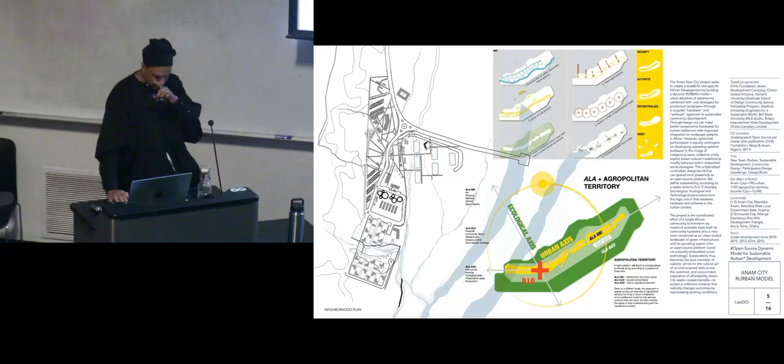This is a project which is still ongoing. We built the first neighborhood. Now it's sort of become a kind of school. One of our proudest achievements was actually getting it into Google. If you ever put a new town into Google, there's a whole process, it has to go through review and all kinds of people checking. When your new town is on a site that's half of the year an island, there's a whole process. But eventually you get through, and it's still ongoing.

The reason why I mention it is that what was particularly significant working in this context was taking materials directly from where you're using them. We built many of these bamboo structures because they were low cost, we could do them fast and quick, and we were able to obtain bamboo by talking with the local deity of the bamboo forest, called Otos, negotiating and requesting access to use these materials, and at their end of life they can return directly back into the soil.

This was, for me, a very profound recognition of a model we use now at Penn State, where I teach the capstone design project or thesis for M.Arch students. We often refer to this model of living and building, recognizing that living at its core speaks to qualities of motion, and building at its core speaks to stasis and the ability to accumulate things in a particular place. Architecture is this negotiation between constant flux and flow of materials, energy, entities, but also, viewed from an African context, spiritual dimensions of reality. All of this exists within the spaces where we try to intervene, ultimately recognizing that we are doing nothing more than trying to modulate these flows of energy and materials over time.

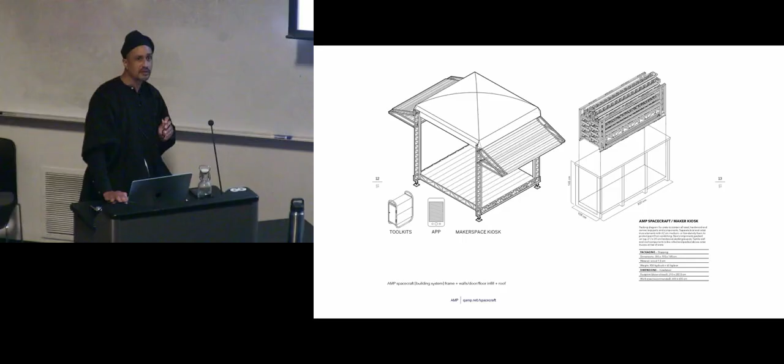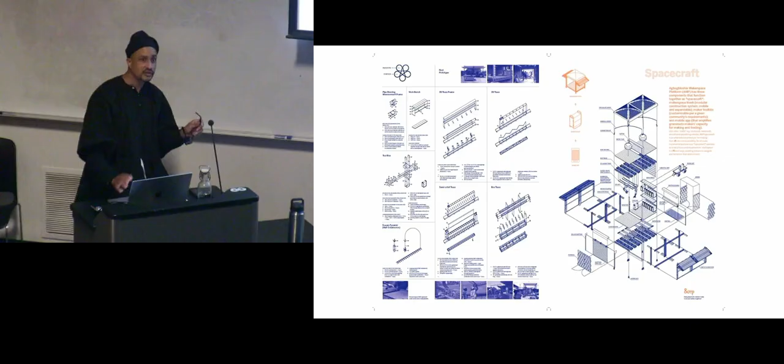Over time this led to the development of a mobile, prefabricated, deployable makerspace, which not only can function as a pop-up makerspace, but also can pack inside of a crate and be deployed. Thinking of this as a kit of parts means you're not just designing the overall building, even if it's small, but actually designing each component and the ways these components can be put together.

This put us in a position of straddling the world of architecture and design with the broader arena of maker culture, thinking about how urbanism and future urbanism are produced—they don't necessarily have to be constructed purely through the design imagination of skilled, highly trained professionals, but can in essence be democratic. How can we make not only the aspects of design, but also the manufacturing or production of architectures, inclusive?

The motivation for this is that if you look at the continent of Africa, which is today the youngest continent on the planet, it's the only world region still experiencing growth. All other world regions are essentially maxing out their human population, and moving into the future will be declining. By the end of this century, there will be hundreds of millions more young Africans coming into the labor force, job market, coming of age, and looking to build futures.

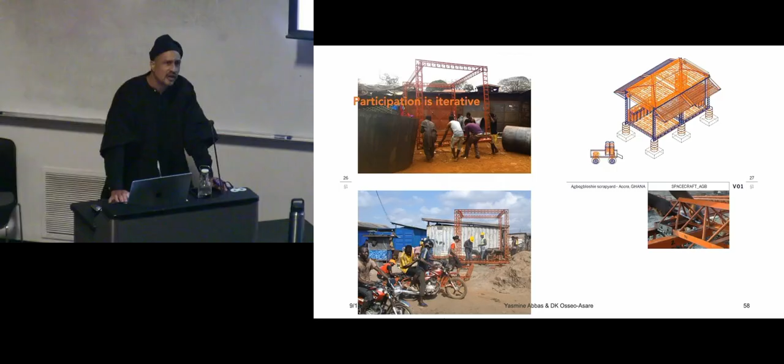For us, that's a fundamental reason why, through this process of participating with makers in all these different spaces to iteratively build a series of makerspaces, the goal has never been any single instance of those, but rather the slow—not that we want it to be slow, but by its nature it often is—iterative development of what we call the AMP spacecraft, a space for crafting. This is a pop-up, mobile, deployable makerspace first developed in Ghana. We did a technology transfer from Ghana to Senegal for the Dakar Biennale, and then they used that as a pop-up fab lab. It's even traveled from Senegal to Mauritania and then back again. So even the architecture itself is moving between countries.

This participation is mobile, so you have people working together from all over the world, but the key is that this participation is a network.

I'm just going to quickly move you through some of these spaces. This is one of the repair shops in that same scrapyard, where we early on recognized that what was often demonized as just a place where things were thrown away was actually a place where people were scavenging, in a way cannibalizing all the detritus of the city, and using that to build, for example, new computers.

At the beginning, the idea of the makerspace was to think about how we could conceive of a small micro building as essentially a large machine that you can walk into. Here you see early tests of aerial trolleys, which we're making as small gantry cranes. The intention is for this to become an overhead, essentially robotic arm system that can support humans in fabrication, but which can be made locally by makers.

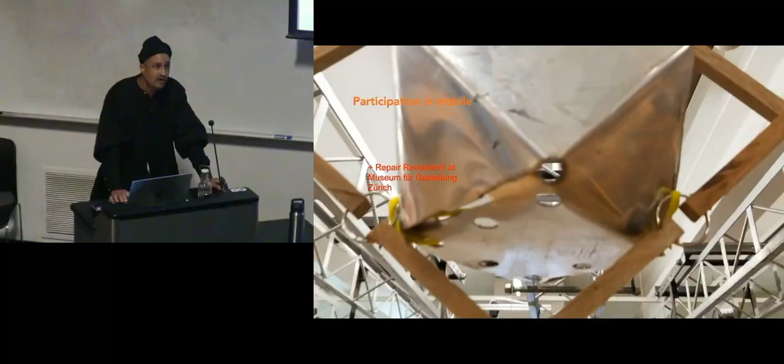This is a dialogue that allows all of these folks to work together on the co-development, and then the makerspace continued to function as a pop-up, and as a makerspace for workshops in the museum, then moved out into the city of Karlsruhe, and then traveled on to Zurich, where it was part of a show called Repair Revolution in the Design Museum in Zurich.

And you can see here on the wall, we actually iterated the next version with the same group of makers in Ghana of what we call this Parawall, as well as these modular components. We were excited that we were exhibited right next to the VW Bug as icons of design. But that same spacecraft is now in Austin, Texas, where it's just been used in a second theatrical performance. So for us, the notion of a spacecraft as a space for crafting is really intended to be not just a space for using 3D printers, but really a place for unlocking the imagination.

I know that I'm more or less at time, but I want to just show a few images of this project to reinforce that same notion, and also this idea of unlocking creative potential and possibility. For us, the key with participation as a way of low design, as a way of lowering the barriers to architecture and participation in design processes, is that once is not enough - history matters, and you really have to focus on versioning.

So this is an example where in just a few minutes I'll show you a project which began as a proposal for MoMA PS1. We called it Bambot Fufuzela as a kind of alternative to robots. Robot, if you know, is actually a word which etymologically speaks to notions of being a slave. And we propose the idea of what it means if we think about architecture as truly emancipated - as living creatures that can exist within our society, but are not required to do our bidding, but essentially entities that we can think about in terms of rewilding the city.

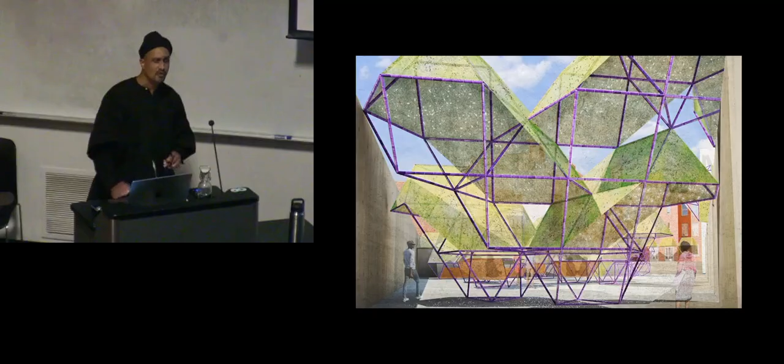So these were sort of proposal sketches. This is the one that MoMA decided to exhibit in the show. And here's the model when we were demounting the day of.

But for us, this was really a prompt to start to unlock the possibilities of this. And we continued this project, even though MoMA wasn't really convinced that we could build it. They were like, how can you guys do all this bamboo stuff?

We continued working with the government of Ghana. We wrote this chapter looking at the future of Pan-African museums, a Presidential Commission looking at the future of museums, monuments, and natural heritage in the country. And for the chapter on architecture, we proposed these Fufuzela as free architectures, in opposition to the notion of the museum as a white box where you put things inside to preserve them, but instead a museum that is free to walk around the city.

So we made these initial drawings, and that led to essentially several years of prototypes, starting on the left, in the same scrapyard, at the very edge of it, in a school, where the same scrap community worked together making this first bamboo structure before it became part of a national exhibition of emerging Ghanaian contemporary artists in Germany, and then continued as the Ghana Pavilion at Venice, and then following as an installation you see on the right called Enviromolecular.

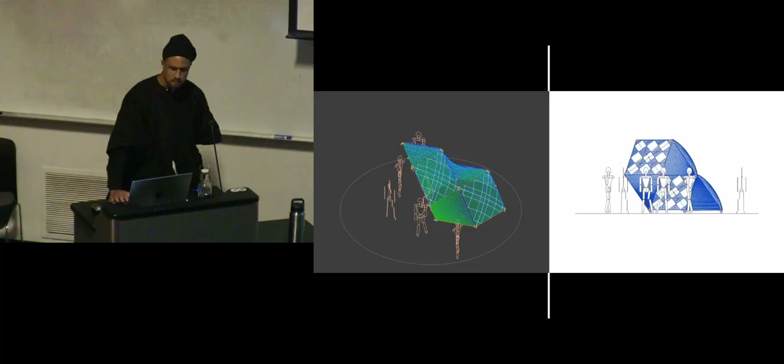And similarly for this first show in Dortmund, the curator, Nana Oforiatta Ayim, was able to actually negotiate for a number of objects that were looted from Ghana during the colonial period and were held in private collections, to have these exhibited as part of the show.

And for each of these objects, we deployed these structures as essentially a home for the spiritual rehabilitation of these objects, working with traditional knowledge keepers from Ghana. We went through certain amulets and energetic elements that were brought into the space to support these objects, which were very significant cultural artifacts in their host communities, to support them in their future eventual journeys back.

And we were able to transition to digital fabrication of the components, a whole host of different experimental orientations, and this eventually led us to the ability to use this as the infrastructure for Ghana's second pavilion at the Venice Biennale, which we did with a budget of nothing, because we were able to reuse or upcycle components from a previous exhibition, and work with some amazing young artists from Ghana, as well as collaborators from Brazil.

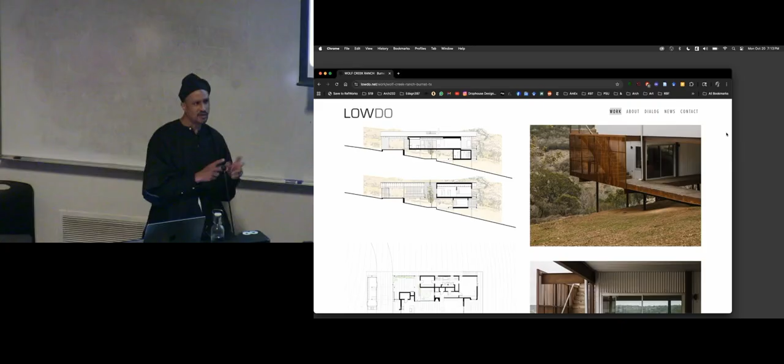Because I was doing that in Ghana with essentially the people in my neighborhood, I was working with these grassroots artisans. They were my lab, I didn't have a separate lab, that was the place. Because my interest was also to make a democratic kind of architecture, that's sort of how it started. That was, for me, the path onto that road.

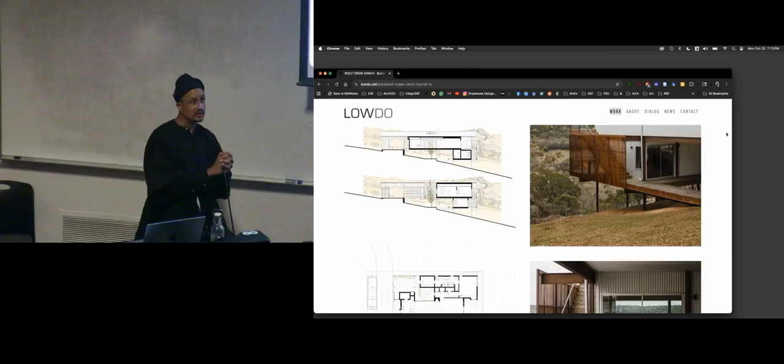But once I was on that road, I realized the longer history of it. We wrote a text, Occupying Africa, building a transformal network for architectural design in the UK, where we go into more detail on the geopolitical histories of this. Essentially, there is a discourse about specialist versus non-specialist cooperation and collaboration.

In a way, for us, it was partly practical, partly a kind of political attitude about architecture being inclusive. But it was also that my mentor, Alero Olympio, a Ghanaian, Togolese, Scottish architect, introduced this to me when I was learning. She was an architect and builder, and her approach was about working with the community.

Even a number of the team members I have working within Ghana were people I met through her. She always encouraged us to think of it as a kind of horizontal, but also vertically integrated, community of makers, and as an architect, to put yourself right down on the same level with everyone physically putting it together. That was the backstory on that.

I feel like you guys would have all run away already, but you're still asking, so I'm here. I'm happy to answer the question, but I don't mind if someone also runs away.